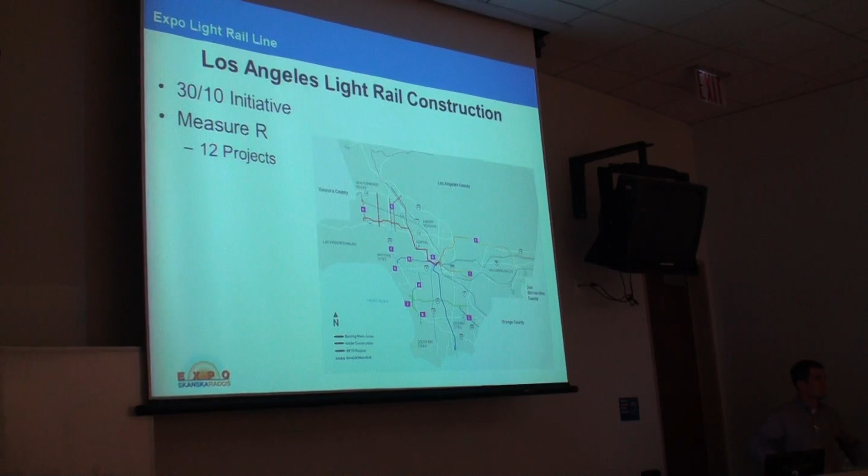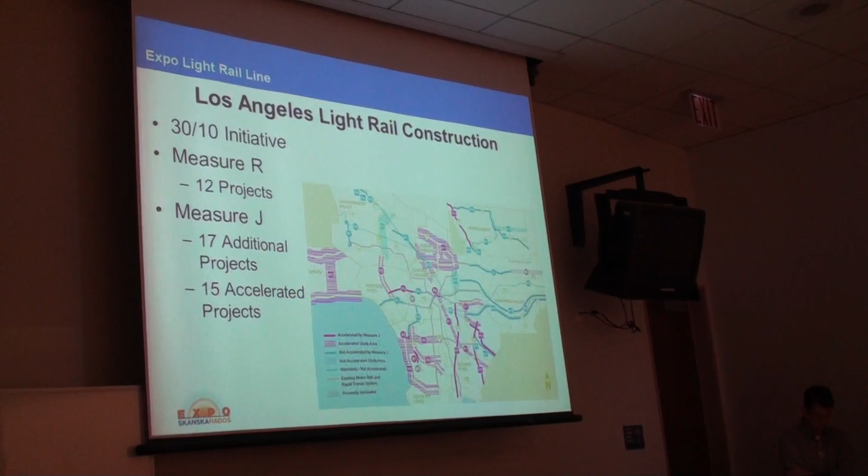And the what? This was all initiated through the Los Angeles 30/10 plan. Measure R was the initial measure that approved 12 different rail projects, Expo 1 and 2 being both of them. Now we're expanding Measure R into Measure J, and you'll see that on the ballot agenda here. In November, the county is proposing Measure J to add 17 more projects, a mix of rail and highway projects, and accelerate 15 of those projects.

You'll hear a lot about Crenshaw, the Regional Connector, the West Side Subway, and then other projects like the I-5 widening, the 91 widening, and of course the 710 tunnel.

So why are we here? The bigger picture of the 30/10 plan: there are 160,000 new jobs. I know our staff well - I was the first transit employee in Skanska's West Coast office, and we're now up to over 100 permanent staff in both our design office and our construction office.

It's going to take 77 million more transit boardings and will reduce the pounds of pollution, reduce fuel consumption, and reduce miles traveled. In Expo's EIR, they predict 64,000 riders on the Expo line per day, which will relieve the 10 freeway - that's the bigger picture.

I'll hand it over to Pat. Okay, so my name is Patrick McCollum. I've been with Skanska for about 5 years. I started working in New York, and about a year and a half ago relocated to the West Coast to work on this project. As you heard before, I live in Santa Monica.

For the past year and a half I've been working mainly out of our construction office, doing planning for some of the structural work as a field engineer. Recently I was asked to move downtown and work with the owner a little more as project engineer, and that's what brings me here tonight.

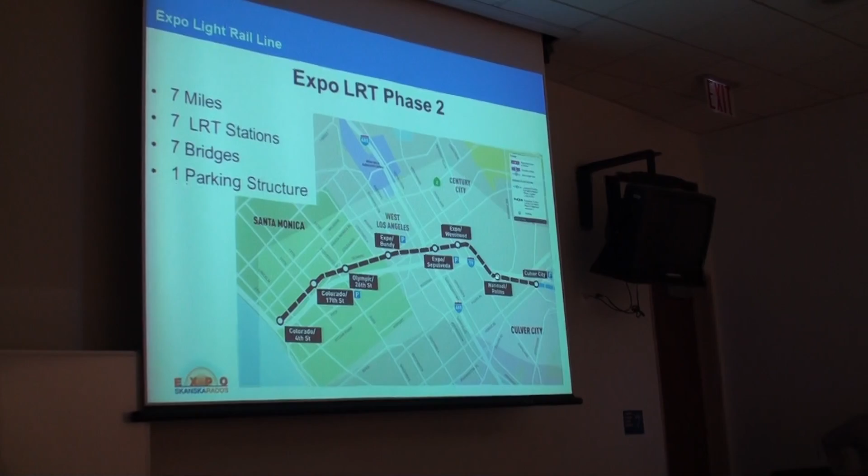We're on the south side of the 10 freeway up until a street called Motor. We cross over Motor and dive under the 10 through a neighborhood called Cheviot Hills. We come out north of the 10 into the city of Santa Monica, and the terminus will be at 4th Street and Colorado, adjacent - actually kitty corner - to the 3rd Street Promenade. So Santa Monica is very excited about our project.

The project is a combination of aerial train and at-grade train tracks. Here on Colorado, from 4th Street to 17th Street, the train actually runs right down the middle of Colorado - you'll have a travel lane for cars and buses, then the train tracks in the middle, then a travel lane for the opposite direction on the other side. So it'll be a multi-use corridor.

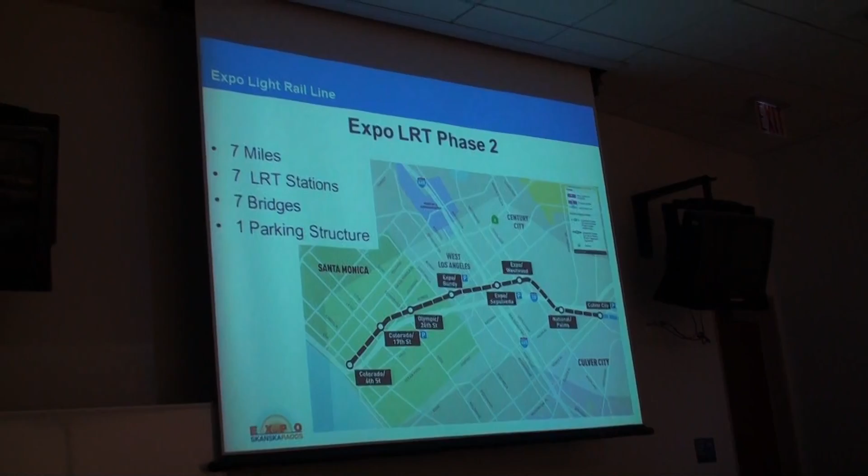Then from 17th Street back to Venice, it's the old Pacific Electric line that was dedicated right of way. Sometimes there are streets adjacent to it, other times it's just dedicated in its own corridor. It has a 100-foot wide right of way, and we're only taking up 26 feet, so there'll be free landscaping or open space for a bikeway to go in parallel. I heard one gentleman in the back say, bike enthusiast.

So it's 7 miles with 7 light rail train stations. There are 7 bridges, which we've started on, and 1 parking structure at Sepulveda. There's also 6 miles of bikeway that will be parallel to the train, starting at Venice - you'll take off through Motor, jog around the 10 interchange, go down National Boulevard, up north on Motor, down Northvale, and then run parallel to the train again all the way into Santa Monica. So you get a nice ride.

Okay, and now we go into the how. Brian told me I couldn't give away any secrets, but I'm going to go through some of the challenges that we faced throughout the process so far.

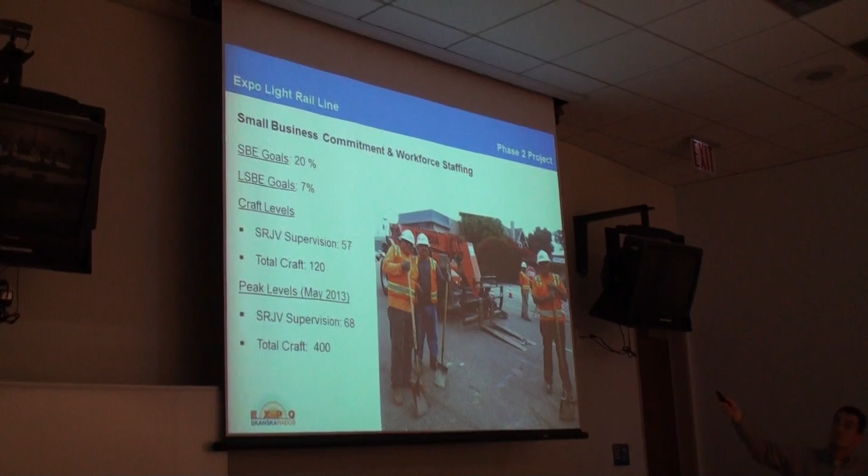Another challenge is the small business community and local workforce staffing. Our project amount is $550 million. Of that, 20% has to go to SBE firms, and 7% to local SBE firms. 20% of $550 million is $110 million. Finding small businesses capable of performing $110 million worth of work is difficult, and that's why we've brought on a full-time staff to help us find small businesses that can help in any viable pathway.

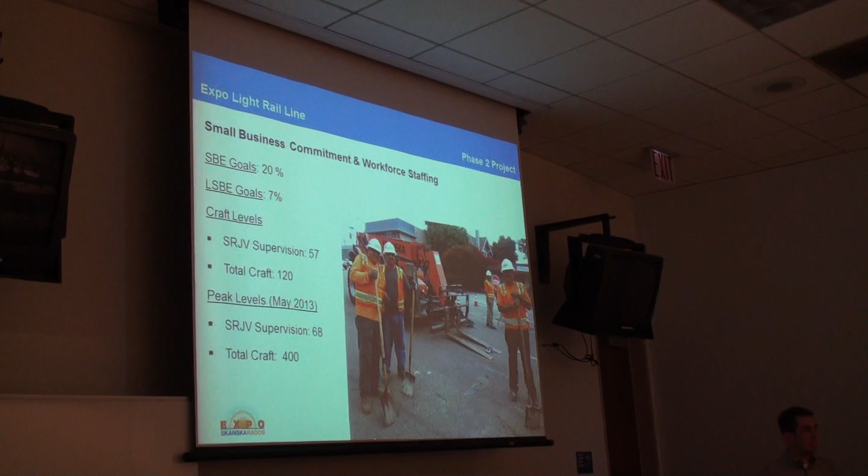In addition to our commitment to local businesses and small businesses, we also have a commitment to local craft. Metro has given us a list of zip codes we're trying to pull our workforce from. Measure R was a tax for people in the county of Los Angeles, so we're trying to hire people within the county, giving back the tax dollars they've already spent.

Right now our craft levels are 57 supervision and 120 craft, and in May 2013 we'll peak at about 400 craft. Throughout the project we'll bring these new hires on board and try to develop them to a point where we can bring them to the next project. That's why safety is so important - after we bring these people on board, we want them to be with us for the next one, and the one after that.

To date - this is actually a few days out of date - we've worked 529 days without incident. And that's not by luck, that's because of all the planning we do.

We have injury and illness prevention plans, and safety, health, and environmental management systems in place. In addition, we make sure all of our management, foremen, and lead men in the crews have OSHA 30 training. IFE training, Injury-Free Environment, is a Skanska training we're doing for 100% of management and 50% of craft by the end of the year. That's another goal we've set because we know how important safety is.

The other reason we've been able to be so safe is the planning. Every activity we do has a construction work plan. We take an activity, look at it generally, then drill down into the details - what work is involved, what equipment and material we need, what crews we'll have, how long it will take, and whether we'll do it during the day or at night. After developing that game plan, it's much easier to go out to the field and execute.

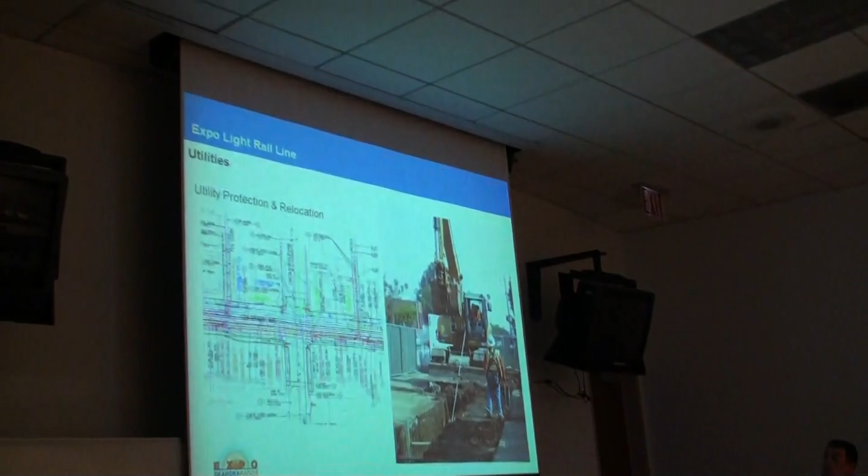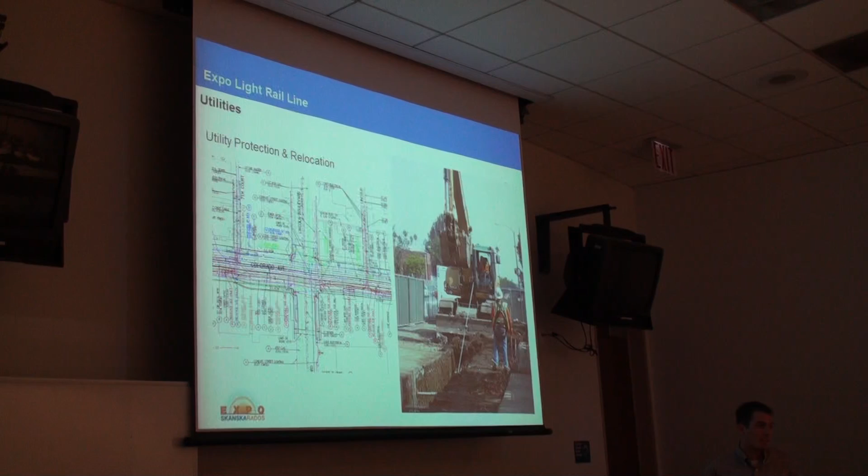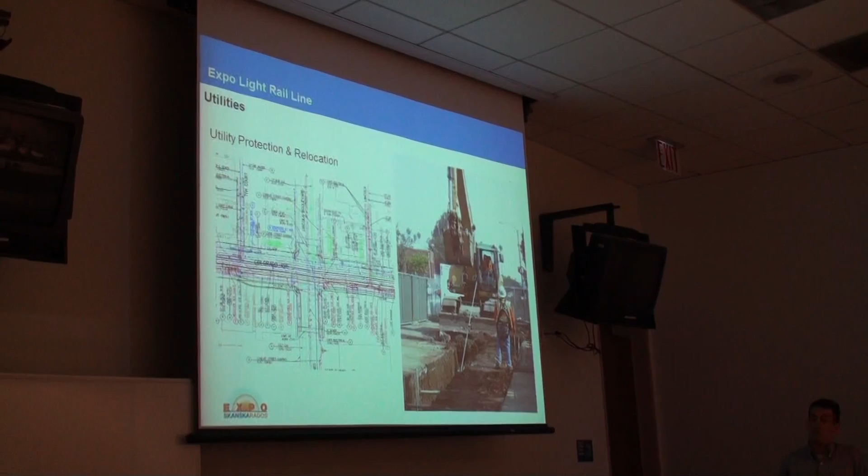One of the major challenges we're facing is all the utilities. You already saw all the different third parties we have to deal with. Each of those third parties has facilities that run underneath our train, the guideway, bridge footings, pretty much everywhere. This is one snapshot of Colorado and Lincoln Boulevard in Santa Monica - if you've ever looked at a plan before, each of those different colored lines represents a different utility we need to work around. Just looking at it, there are about 40 or 50 at one intersection.

So this is 400 feet of the 7 miles we're dealing with. Now granted, Colorado's a little more difficult because it's in the middle of the street, but this is just a picture of what we're dealing with.

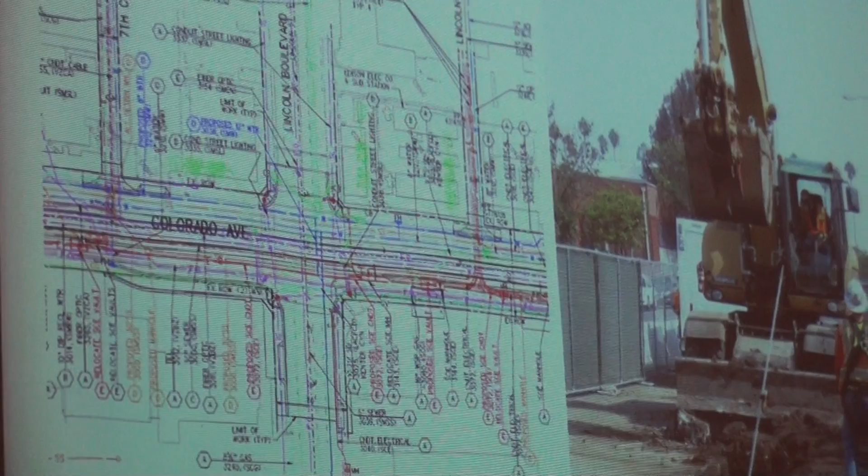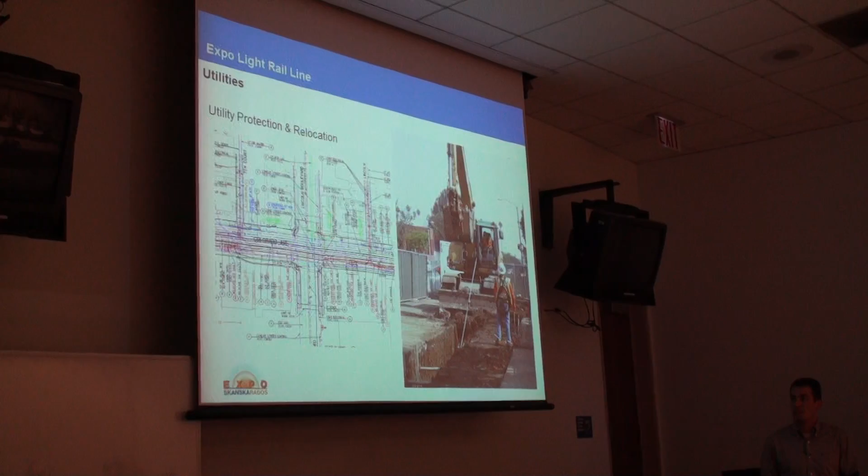One of the ways we planned ahead to work around all this was to do potholing in the first 6 months of the contract. We went out into the street and cut trenches to identify where all the utilities were, because as we looked at as-built information, it wasn't precisely accurate, to put it nicely. So we cut holes in the street and were able to put our hands on all the utilities we were dealing with, then pass that off to our design coordinators, who could design the workarounds, relocations, and protections of those utilities throughout the entire line.

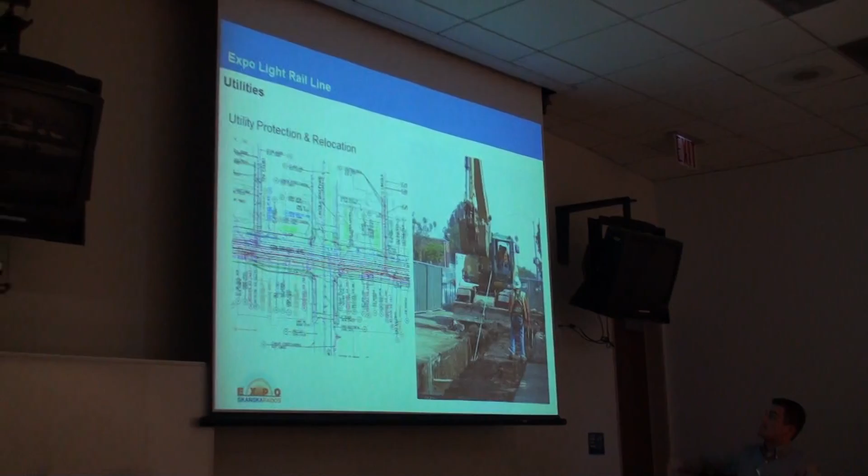So after all that planning is done, it's easy to go out there and make it look nice, neat, and clean, like you see here.

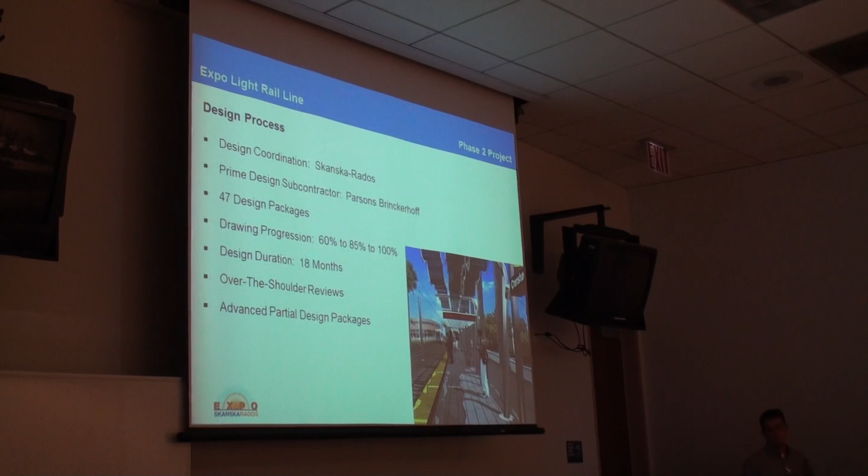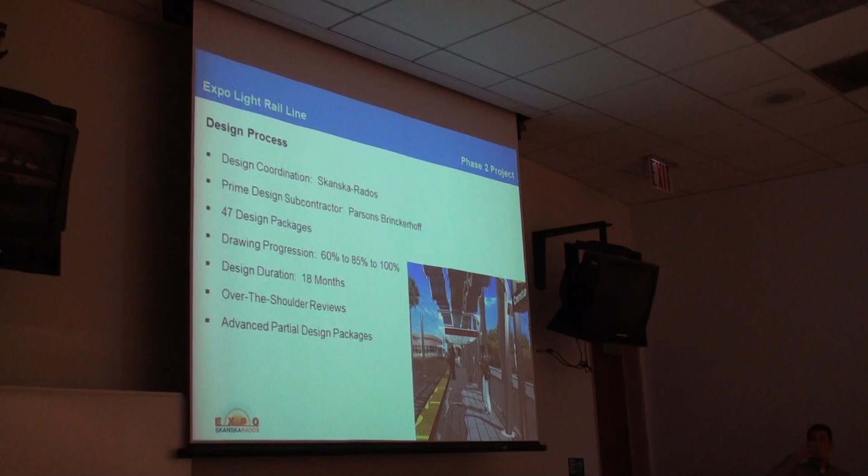The challenge of the design is you have 7 miles of a linear project, and the county reviewing your plans, the city of LA reviewing your plans, the city of Santa Monica reviewing your plans. The city of LA is broken up into 9 different reviewing agencies that have to review your plans. So we broke the plans down into 47 different design packages, trying to make those manageable, bite-sized chunks where they can get a review done and continue on.

So we set an estimate for ourselves of 18 months of design. We're in our 16th month. We hope to wrap it up by this December and then go into design support during construction as of the first of the year.

We also employed some over-the-shoulder reviews with our agencies having jurisdiction. So we meet with them beforehand, discuss our concepts before we turn in the design, and then they have it for a month while we work on something else. And last but not least, the advanced partial design packages.

We pulled out some of those early utilities. Typically the utilities and the roadway, the traffic signals, all goes together in one big package. But we would pull out the water lines and the sewer lines to go ahead of the roadway packages, so we can construct those and get them out of the way of other work.

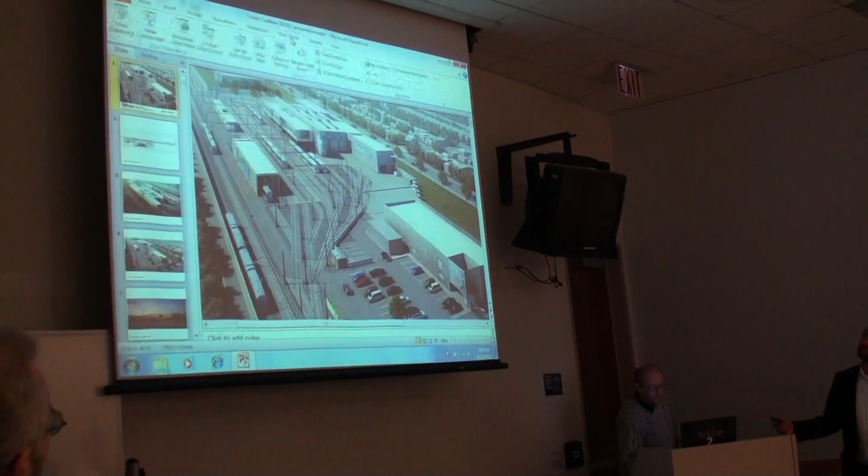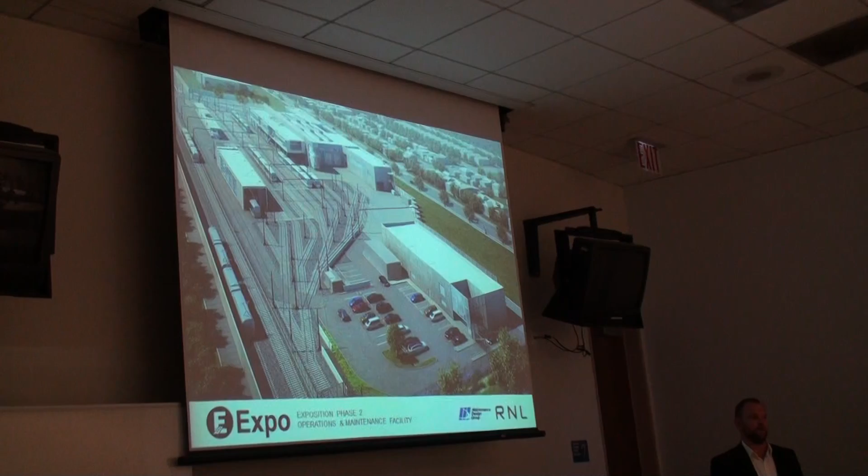All right, so this is the flashy picture portion of the evening. I just wanted to point out a couple of the other team members here. John Holler with Maintenance Design Group was the prime of the project, in charge of the transit planning and equipment specifications, and we've worked together on a number of projects. Will Todd was also one of the project architects on the project from RNL. We've been working on this since about last April - we really got started on the design in earnest, and it's a design-bid-build.

Everybody's going to be brainwashed when we leave so nobody can see what's up here, but we did want to show where we're at with the design and some of the innovative things we've done. This is directly adjacent to the Pico neighborhood in Santa Monica - Olympic is right here, Stewart and Centinela, and this is Exposition Boulevard. All along this neighborhood and all around us we have sensitive receptors identified in the EIR.

And so we've got IMAX, Lantana, a lot of audiovisual engineering and production places on the commercial side, and then neighborhoods, single-family homes on the south side.

So we walked into the project knowing we had to get buy-off from the neighborhood side first, and that's how we started the process - sitting down to hear what their issues were. The primary concerns were noise of the yard.

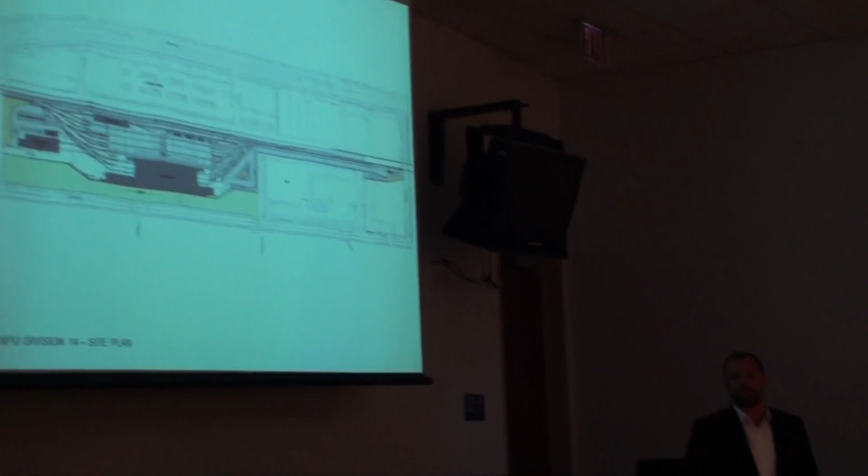They had taken their neighborhood group out to the green line and listened to it, and they were concerned about a number of things, including light spill. They wanted to make sure that at night, when operations and maintenance were going on, there wasn't a lot of light spilling into the neighborhood.

And then in the EIR, the maintenance facility was located down in this corner, and this green strip is a buffer. So the building came right down to the edge, and the buffer was a little wider out here, which left the yard exposed to the neighborhood.

One of the things we said, first and foremost, was we wanted to move the maintenance facility building to block sound and light from the neighborhood, rather than trying to do it with sound walls and other things that don't work as well as a 30-foot high building. So we did that and got buy-off from the neighborhood to proceed with the site plan.

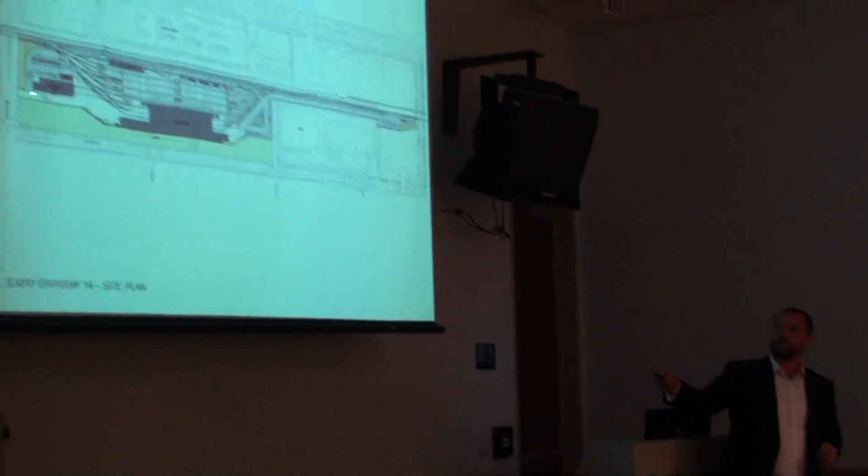One of the nice things it also allowed us to do was change the original stub-end shop design. With 3-car train sets, we had to move 2 cars out of the way, pull 1 car out that might be buried, and then move the other cars in. So the number of train movements was considerably higher than what we ended up with in the final solution, where trains can just pass right through.

In real quick terms of how the whole thing works, we've got the primary entrance for operators and maintenance personnel coming into this parking lot. There's a guard shack, so this is really the primary entrance. And then a fire lane comes across, running right adjacent to the main line.

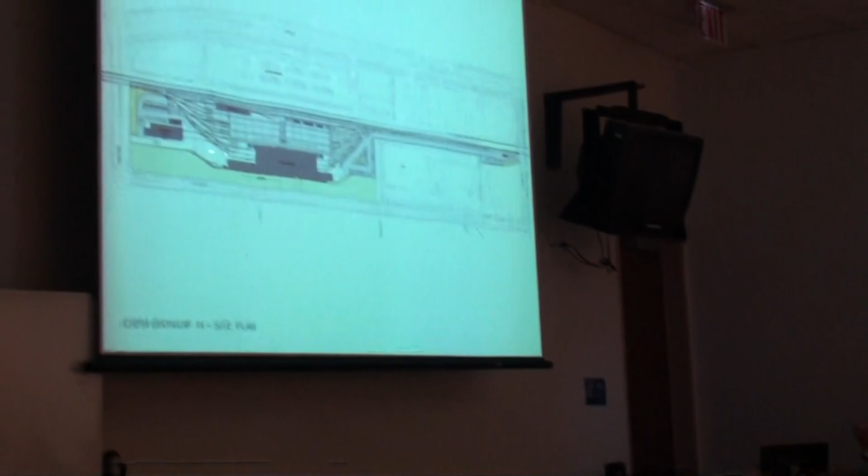We've had a number of coordination meetings with SRJV. And then the delivery entrance comes in here, into a loading area and parking for operators - this is administrative and maintenance personnel, and that's operators.

And then we broke apart a few of the other specialty buildings. The main building itself has warehousing, maintenance and shops, then 6 S&I - service and inspection bays - and 3 positions for component changeout to do heavy repairs.

And then on the north side is just a 2-story building, and we'll see that when I show you some of the renderings. That's where the operators are housed - they've got their lounge and break room and their spaces, as well as administration.

Out on Stewart Street is the blowdown, where they wash the underside of the train and do heavy cleaning on a periodic basis, and then the wheel truing, for when they hit the brakes hard over a flat spot in the wheel and have to re-true it with a lathe. So that's some specialty operations that happen in this secondary building.

Our traction power substation sits right adjacent to it. And then the car wash, for the trains on a daily basis, comes through and gets an automated wash cycle, and a cleaning platform where personnel go in with vacuum bags and clean out the inside of the train.

So that's generally how it works, and then the rest of the yard is basically where the 45 cars that make up the fleet will be stored.

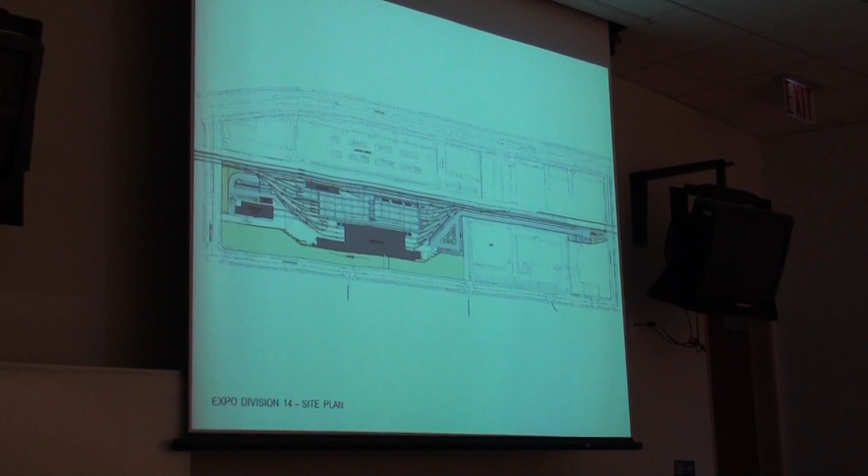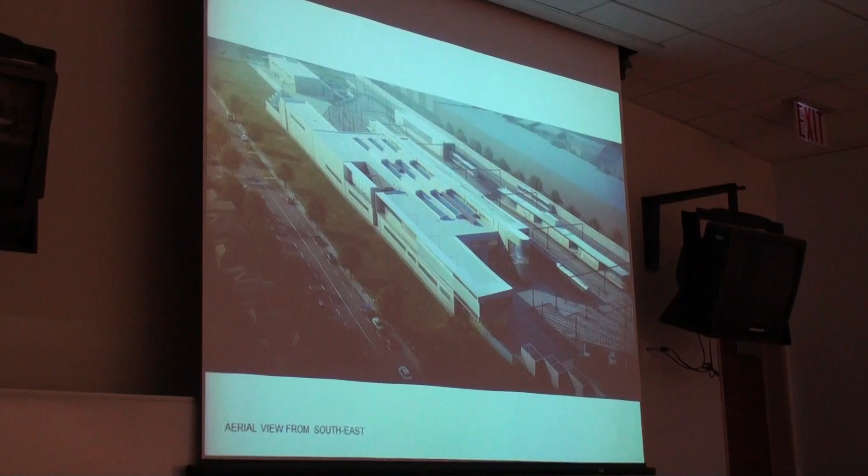One of the things we knew we needed to do when we stretched out that building - it's 500 feet, well, 540, something like that, long - it's an extremely long building, but to put something like that next to a neighborhood is an architectural challenge to break down the scale of that.

So what we did was, using all those different components - the administrative areas, the maintenance, some of the shops, and the warehousing - we broke that down, so we've got a building that really doesn't impact the neighborhood negatively. And we did a number of things to bring some sustainability measures into it.

I'll save that for later. Got a slide that kind of explains a lot of that.

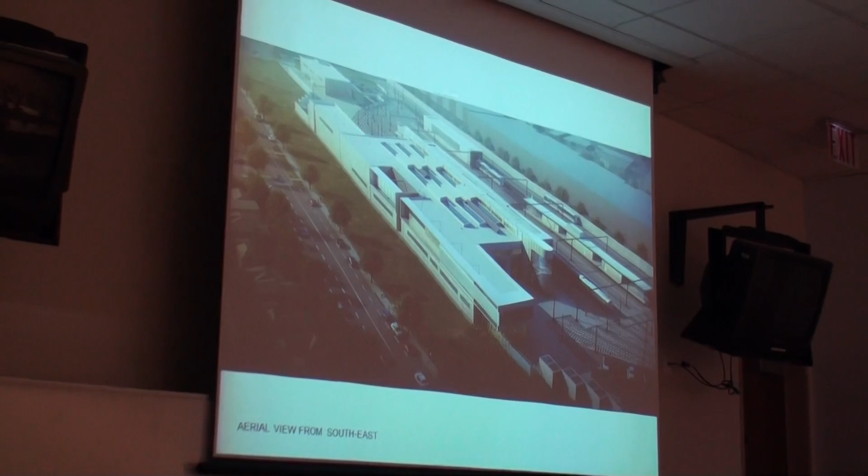We did a gesture here to the neighborhood to really make the front door, although it's not accessible from the neighborhood, we put glazing there, and we've got a view into one of the nicer parts of the building itself. So not really turning our backs and saying you've got no business knowing what's going on in this yard, but I would open it up to the neighborhood.

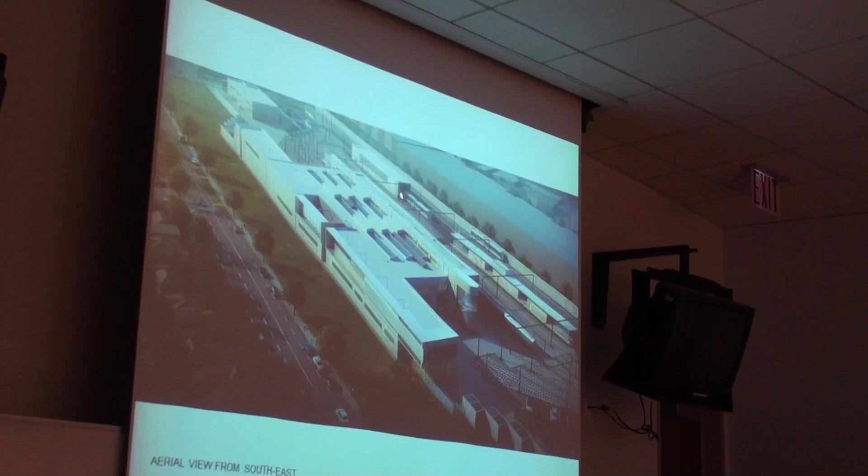So you can see the other buildings I talked about. The cleaning platform has a covered canopy over it, which is really helpful for the people working out there at night, in the cold and the rain on occasion. The train wash, and then the secondary building.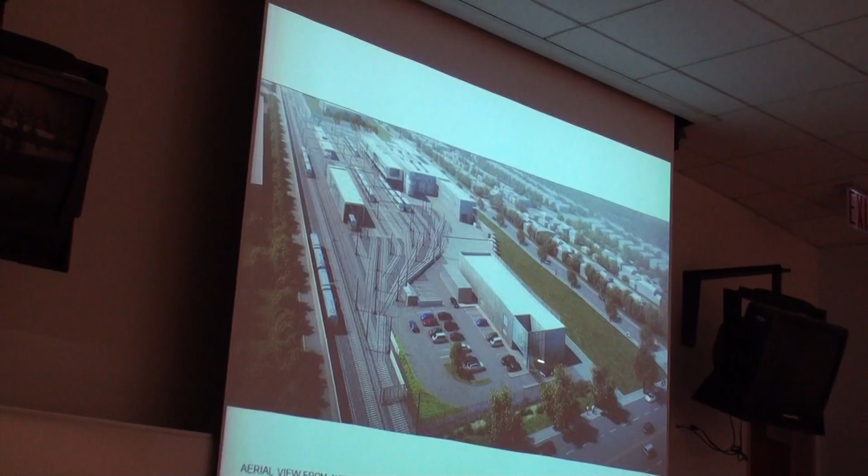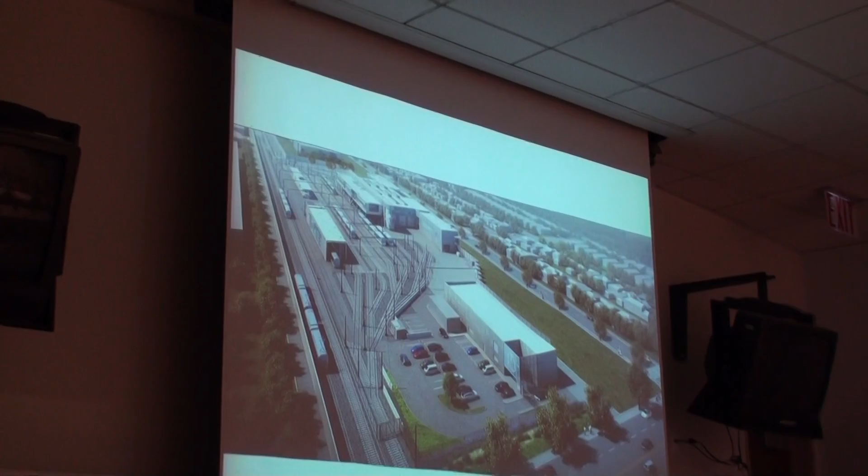That's another view from Stewart here at Exposition. Good opportunity there for some signage to really let Metro's logo and brand identity show, and you can see the main line running right along here. So everybody going past this is getting a look into the yard, getting to see some of the operations that are going on, versus kind of hiding it all behind walls.

That's a ground level view of that same angle, so that's the grade crossing at Stewart. And this is from the corner on the other side of Stewart and Exposition, so the neighborhood is off to the right here. And this is basically how we eroded the corner there, and whatever they do with the buffer is a good sort of pedestrian connection.

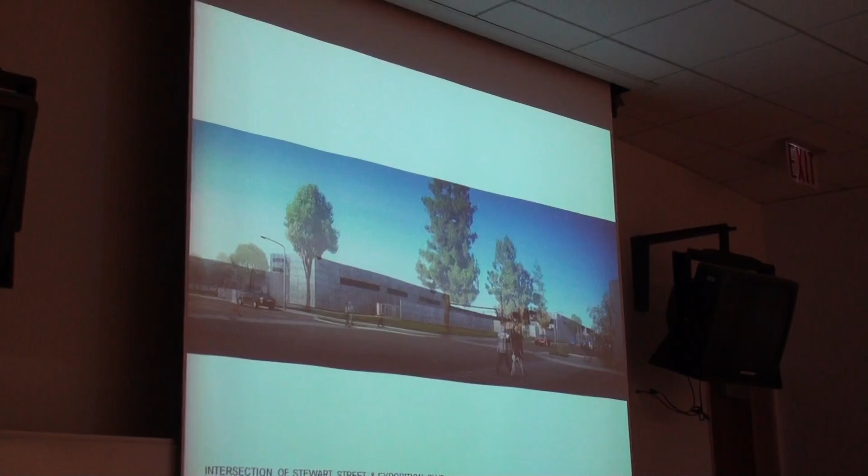We brought a green belt basically along the entire south edge of the site, so it's helping make a nice pedestrian environment next to a rail yard.

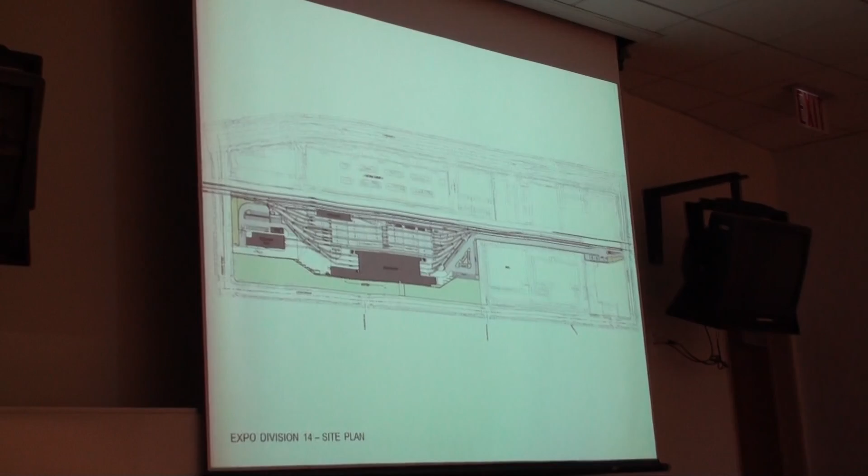Covered the site plan, but let me zoom in onto the building itself. This is a plan of the overall layout and the main entry into the lobby. So this is that ornamental stair that I was talking about, coming in, elevator, and a break room for the maintenance personnel, and then their changing room and lockers.

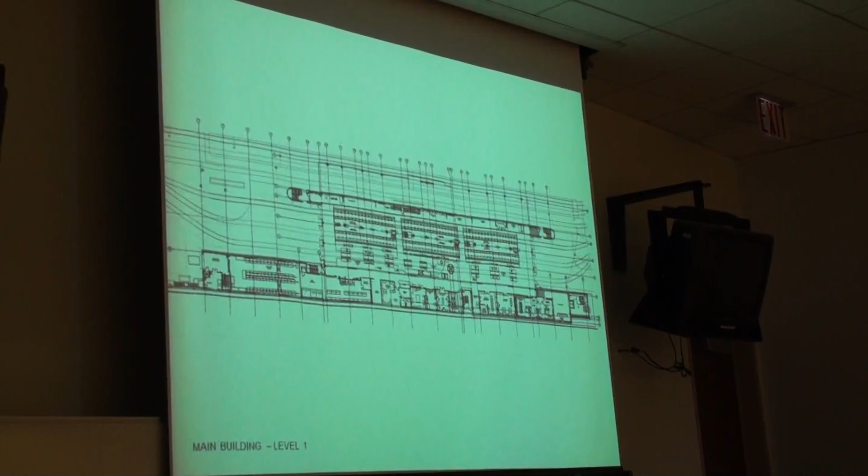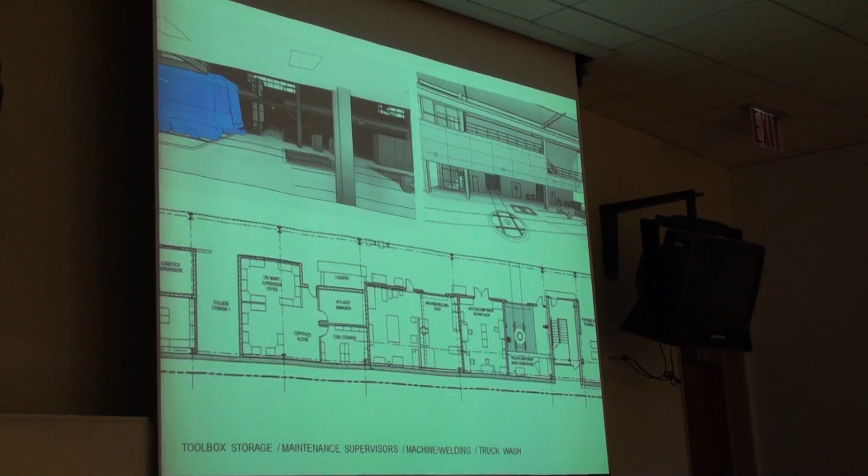Toolbox storage, this is where a lot of the working on the trucks and the wash of the trucks happens, and replacing and fixing things on the trucks for the wheels on the other side of the train, and then some specialty shops for machine welding and component repair.

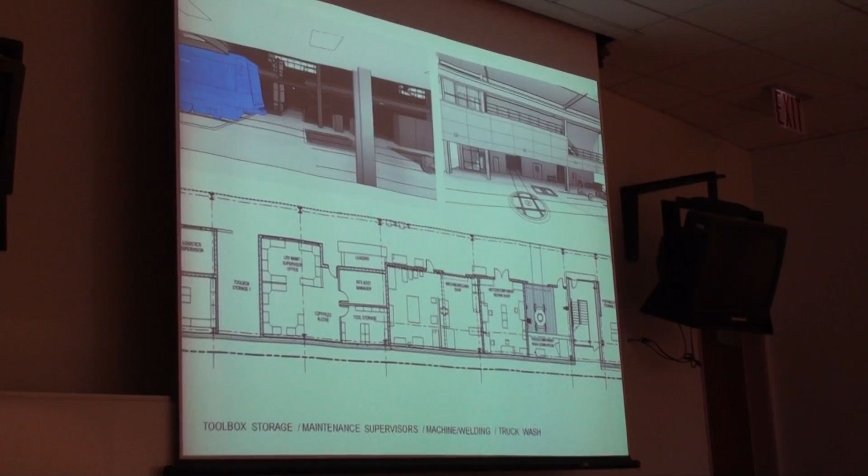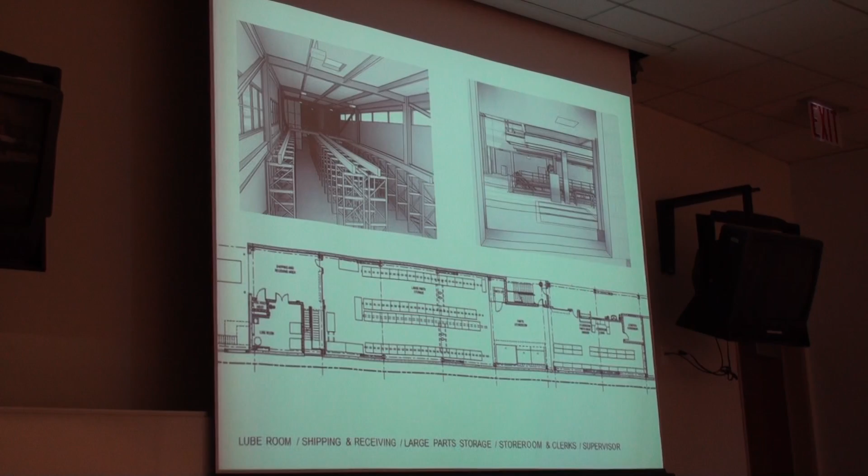Then the maintenance supervisor shop, and then it starts to lead into the warehouse space, the parts, shipping and receiving. So a number of racks and storage equipment that allows them to densify all the pieces and parts and have it on hand, keeping it in a dense, efficient footprint.

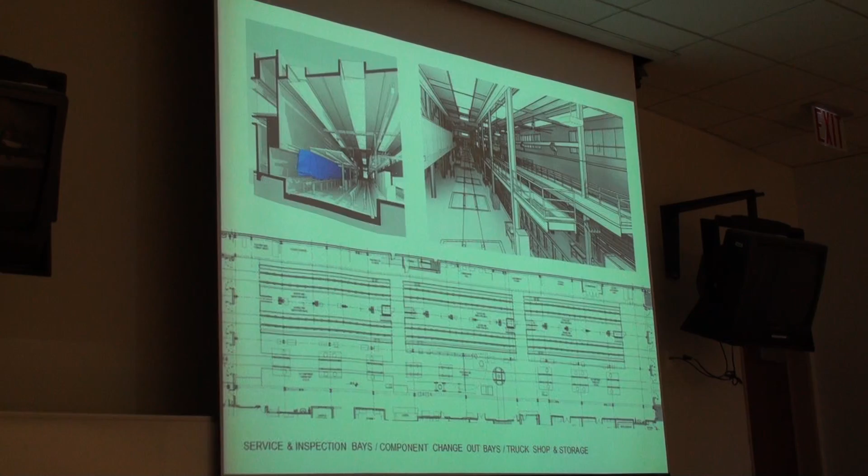And then looking into the main maintenance bays, we really wanted to open this up. We brought skylights in that bring a lot of daylight down into the area. These are 24-hour facilities, so sometimes they're working during the day and can benefit from daylight. We wanted to make sure this was an energy efficient building. We're well within LEED Gold and approaching LEED Platinum, which would make this the first LEED Platinum rail maintenance facility in the country. It really improves the feel for people when they're down working in the lower level work areas — they get daylight and some fresh air down there.

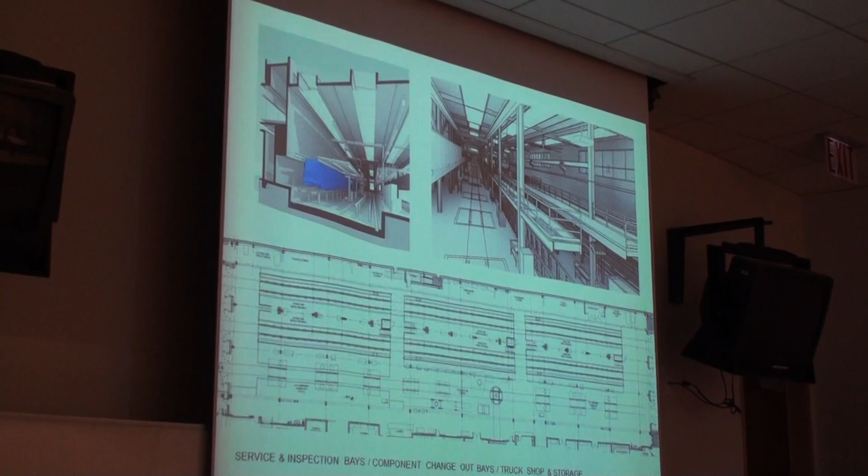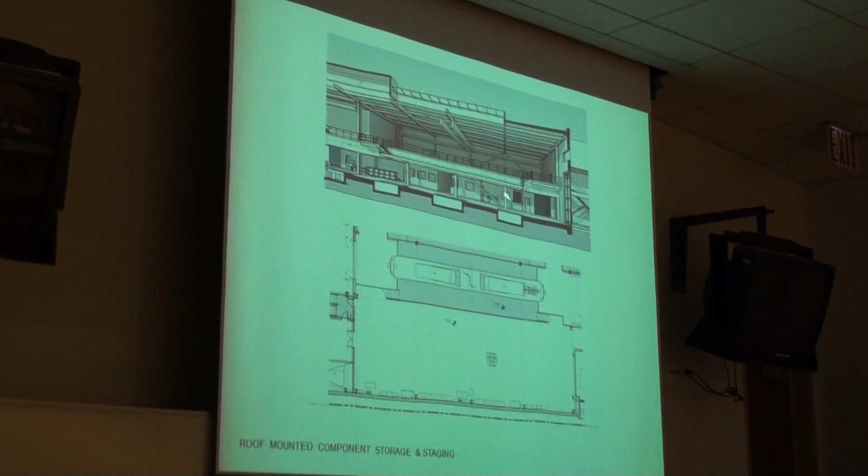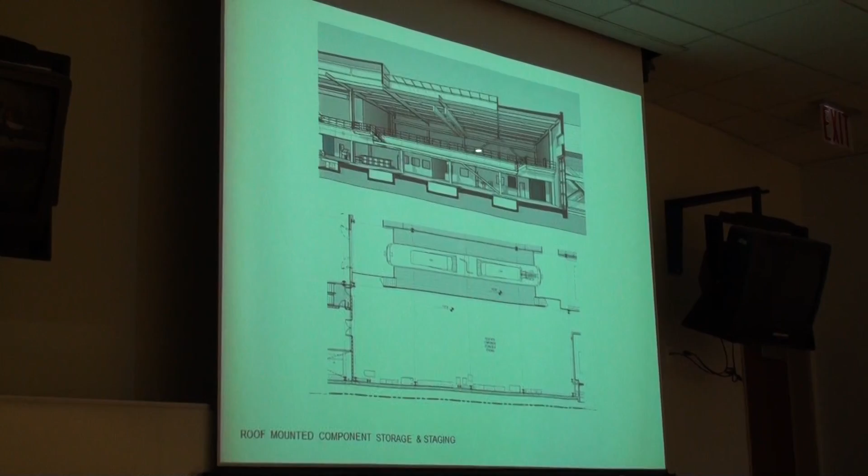Above the parts storage here, we've got a bridge crane that picks up the air conditioning units and other rooftop mounted equipment on the trains, and can slide it right onto a mezzanine level. So there's no complications in staging—they just pull the train right in, pull that off, and slide it onto a mezzanine to be replaced or worked on. That's the upper level of the shop, parts storage.

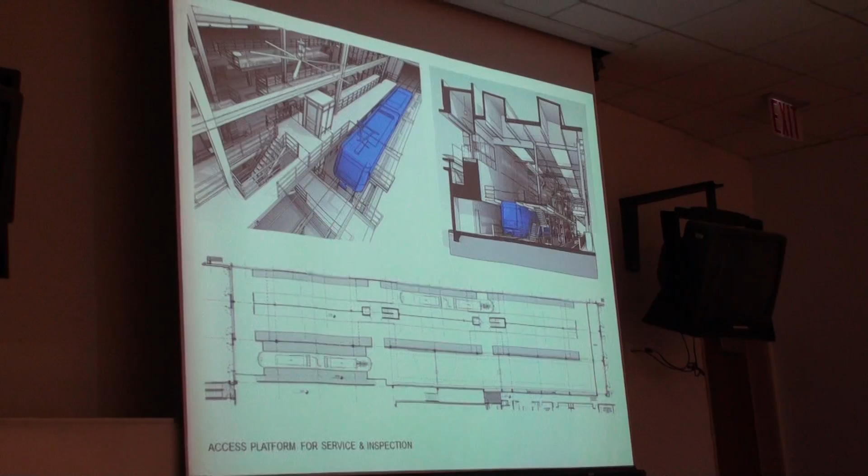One of the things we did that was really innovative—and John, you can touch on this a little bit—is the way we handled the upper level work platform for when maintenance personnel need to work on the pantograph and elements on the top part of the train. With an overhead catenary system, that's a powered line, and there's a lot of danger of electrocution if you're not careful. So it's got a lockout system that doesn't allow you to go up onto that platform unless the overhead catenary is deactivated. Probably not doing it justice, John, but it's top secret.

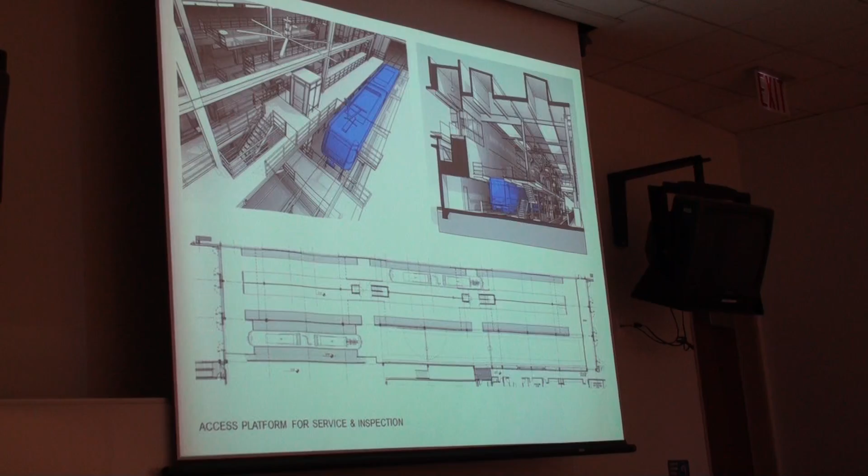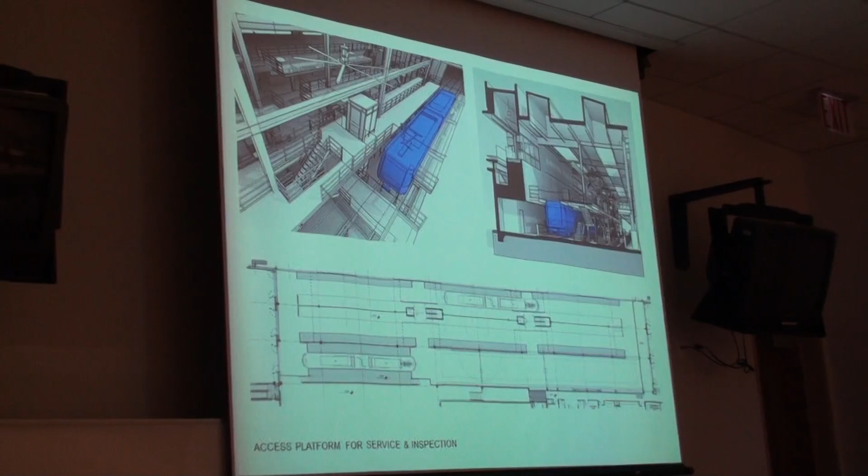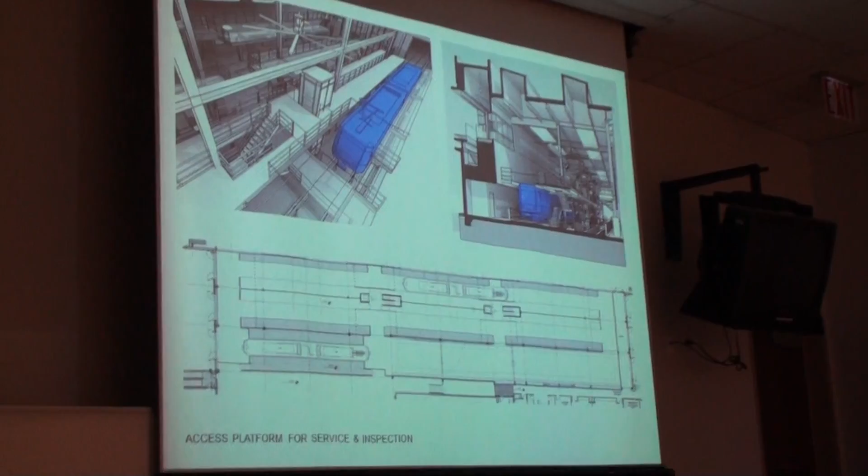It's really something we've done to innovate on best practices that Metro's been willing to accept. We're also using a different way of handling thermal comfort in there. Typically you have a lot of gas-fired heaters and just relying on natural ventilation or forced air. We're using what's called in the industry a big-ass fan—basically a gigantic ceiling fan that turns at a really slow velocity but pushes a large volume of air. You can use it in both directions, and it actually helps heat the space by pushing hot air from the upper levels of the shop down to the work area where the guys are working on the other side of the train.

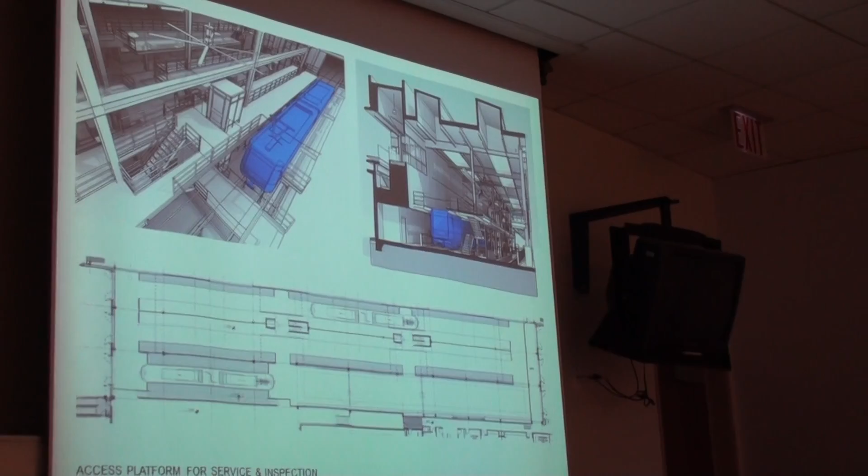But it's super low energy consumption and allows us to approach a net zero energy readiness. So if Metro decides to increase the amount of photovoltaic solar panels on the roof, they can reach energy balance where the power they're drawing to operate the facility is offset by renewable sources. The meter actually turns backwards, which is nice, saving Metro some money.

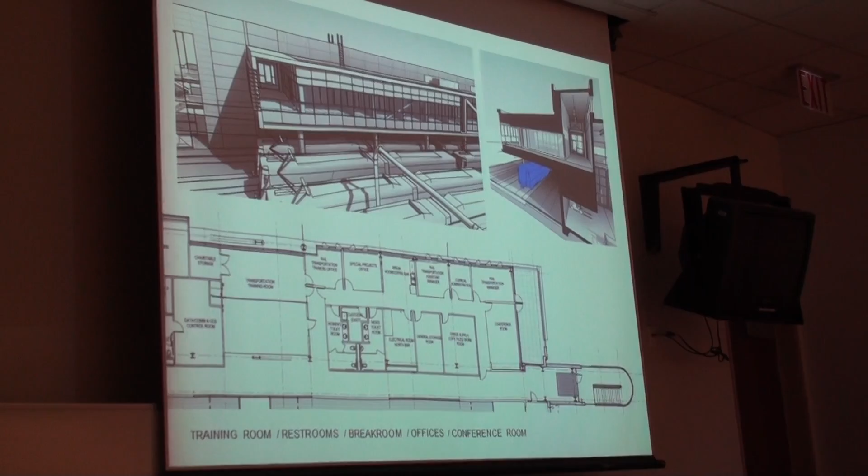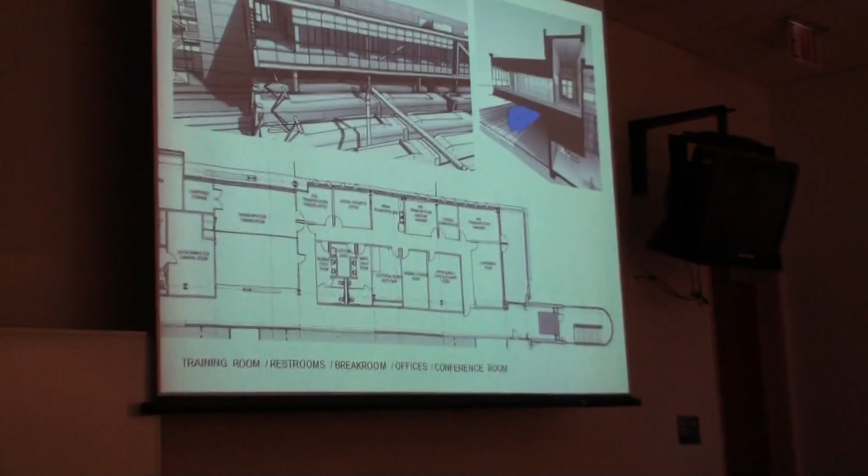On the north bar, as we're calling it, the administrative suite—all the rail transportation managers, conference rooms, and some executive spaces for the people that run this facility—are here. They've got a good view out onto the yard. That was one of the challenges as well, since there's a general feeling that they want to have eyes and ears out onto the yard as much as possible. So we placed those program spaces out, hovering over that. We went through some gymnastics to get it to be a second story space, but managed to get them a really great view of the yard.

Then as we go into the control suite, this is where it's really critical. We pop that volume out so they can see a 180-degree view in both directions of all the trains in the yard. That was something we're really happy we were able to work into the design.

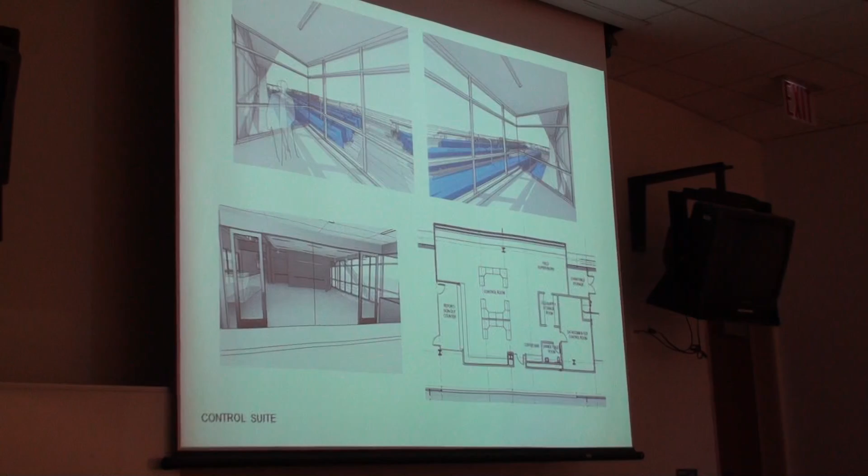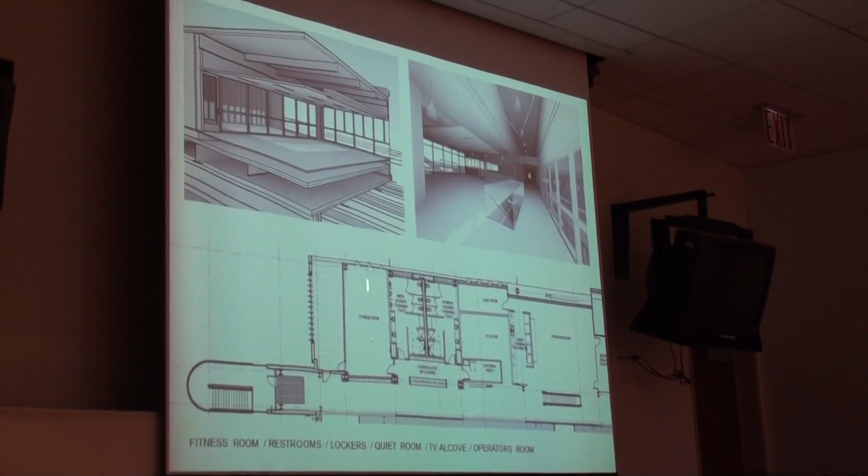Then the operator space—their home away from home when they've got a layover between shifts. They're up here doing their thing. There's their operator's room and kitchenette, a quiet room if they want to take a nap or read a book, a TV alcove, and then their lockers and the fitness room, with a patio that opens up out onto the west side of it.

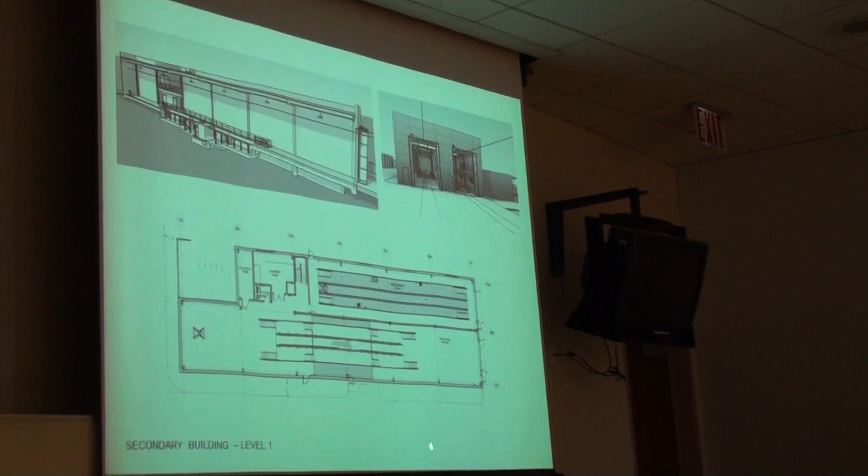Jumping over to the secondary building, this is the one out on Stewart. The wheel truing and blow-down bays are two fairly specialized pieces of the project. We've got a subgrade pit the wheel truing lathe sits down into—they just pull the train in and bring the lathe up, and it trues the wheels right as they're sitting in place. So it's a fairly seamless operation, and they move each truck along inside of that building. We can close the doors, minimize the amount of noise that spills out, keep the neighbors happy—everybody wins.

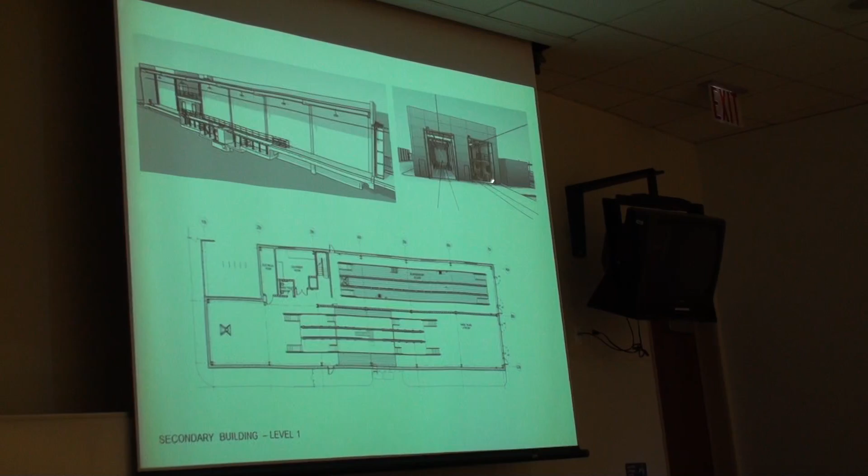And then the blowdown is a real dirty, wet operation. Same thing—we pull the car all the way in, close the doors, and they go to town and wash the junk off the bottom side of the train that accumulates over miles of travel.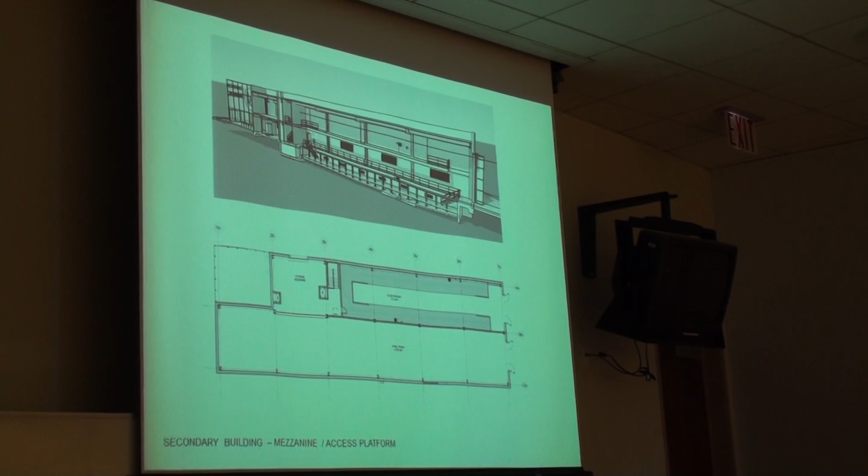It's just got a drain that basically captures everything. It's a posted rail, so there's space underneath to let people be underneath and wash the underside of the train, and all the junk kind of slides down the drain underneath them.

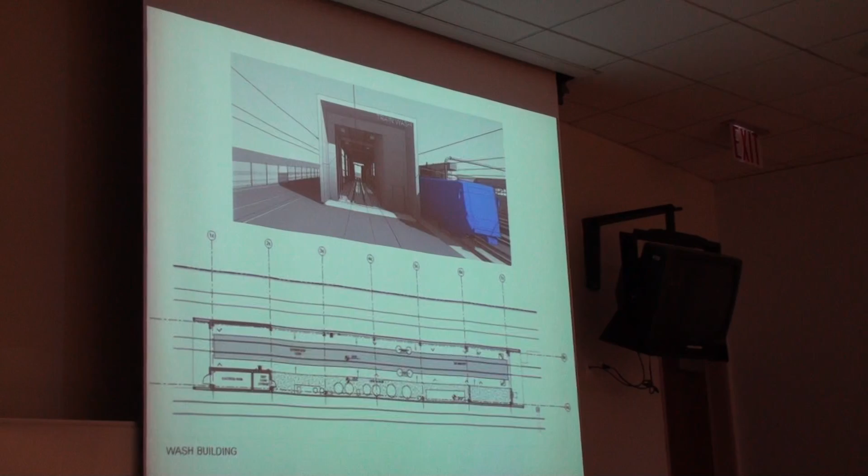The train wash is fairly simple, just a clean shell, but we wanted to try to daylight it as much as possible, again keeping the energy consumption down, and load up all the equipment so they just pull through at a prescribed rate for the train, so they can get every nook and cranny washed on the vehicle itself. And then pass right on down to the cleaning platform.

Where they wash the inside of the train, vacuum it out, and take care of the sanding that they use for traction, or refill the sand in that phase of the maintenance cycle as well.

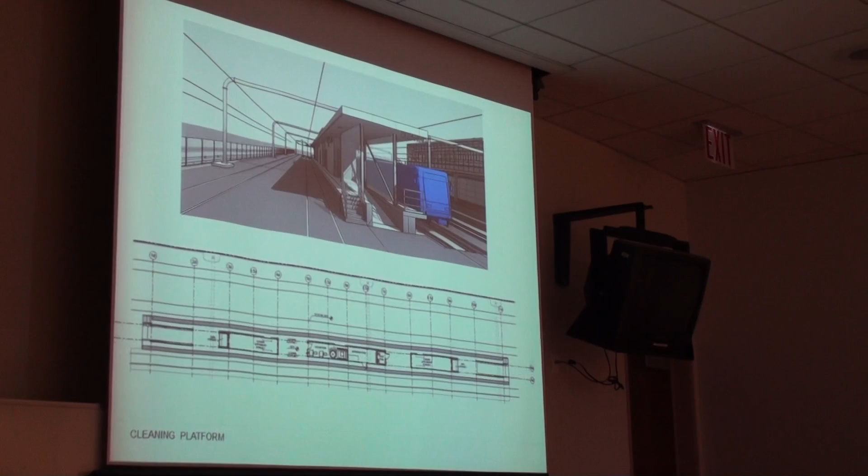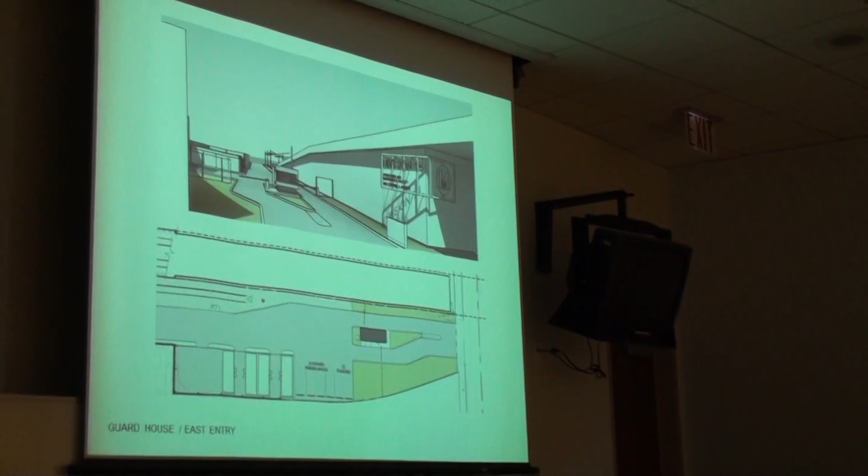And then lastly, down in the guard shack, part of the interface with the main line as well, dealing with our signage. We wanted to make sure we got good Metro brand identity and recognition, and people know where they're going as they come off of Centinela and into the facility. Some maintenance of way equipment and storage here, and a maintenance of way track also that they can use for the main line. So just a few more close-up shots.

The stair, we did some fairly creative stuff with it, kind of radiused it so there's a little bit of an image for the building that people can identify with. And if anybody's familiar with the Van Nuys flyaway, that cable system they're using there, it's the same sort of deal here. So it's a series of cables that create that guardrail, something at least somewhat interesting architecturally.

We knew we couldn't just go in here and slap together a maintenance facility on a low budget. Santa Monica holds to a pretty high standard of architectural design, so that was one of the things we really had to take to heart. And we went before the Santa Monica Architectural Review Board, and came away with no comments. So we were pretty ecstatic about that. That doesn't happen too often, if ever.

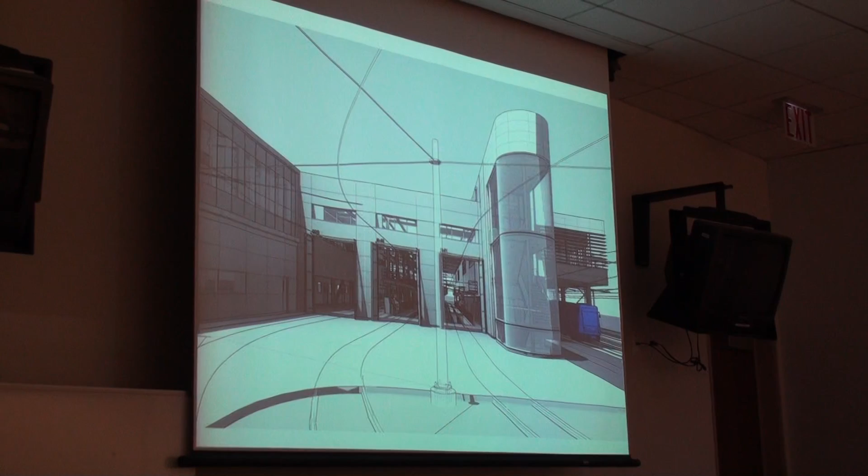Our work on the front end paid off to make sure the neighbors were happy, the neighborhood association was happy, and then ultimately the city was involved all the way through.

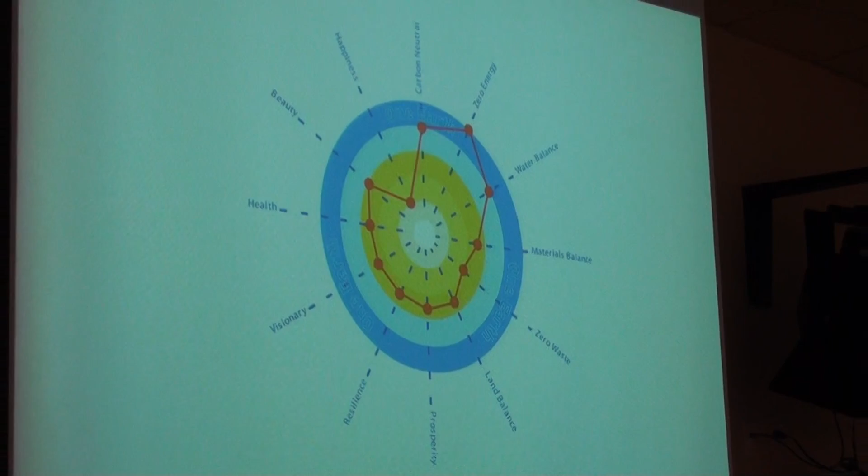And then lastly, I want to touch on the sustainability things that we did. In the early programming process, we used what our approach to sustainability is called Design for One Earth measures, in alignment with APTA's sustainability commitment. Not just the things that LEED deals with in environmental engineering, but happiness and beauty and social sustainability as well as economic sustainability. So we can build a great net zero building, but if it doesn't pencil out and it costs the agency a lot of money, then it's not really all that sustainable.

So this little rose diagram demonstrates where the agencies, all the different Metro Expo folks, weighed in and said these are the most important things to us. Net zero energy was clearly high up on the list, and happiness—there's a lot of metrics for how you quantify happiness—but clearly that was something we didn't say was unimportant, there were other things that really trumped it. It was more about building performance, because this isn't as much of a public facility as, say, a transit center, which would put happiness really high up on the list. Health and some of the other values were kind of middle of the road, but that gives us a roadmap for how we make decisions on sustainability measures.

So one of the things that we really were happy with is the amount of water that we're capturing and saving. Santa Monica's got some pretty steep penalties for letting your stormwater just run down the drain. So what we did is capture everything off of the buildings and everything out of the yard, and we have two gigantic rainwater storage basins here, and that's going to train wash and irrigation.

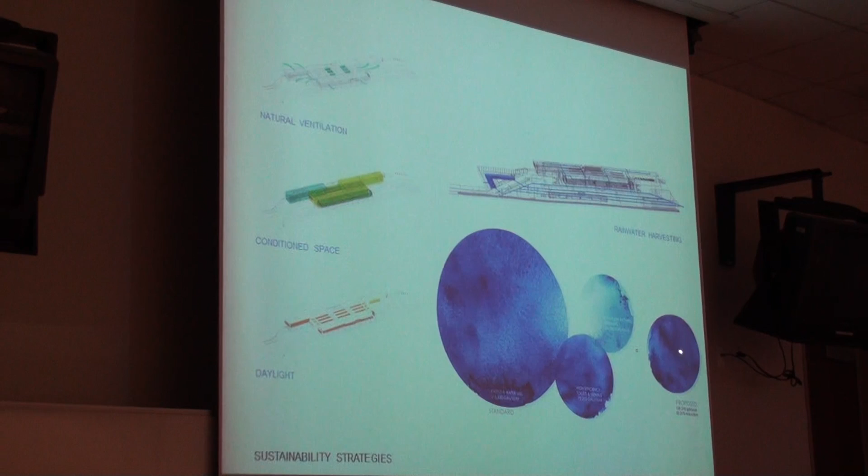We're offsetting—this is the baseline standard for how much water would normally be used in this facility. That represents the savings we got from high efficiency toilets and urinals and low flow fixtures. So that's actually the amount of water that we'd be using, and then we're offsetting it with the amount of rainwater that we're capturing. So a pretty significant reduction in the amount of water being used.

A couple other things too, I mentioned the natural ventilation. The big ass fans are drawing the air in from the open doors in the summer, and the thin sort of profile of the building allows them to use the operable windows in the people spaces and let breezes pass through.

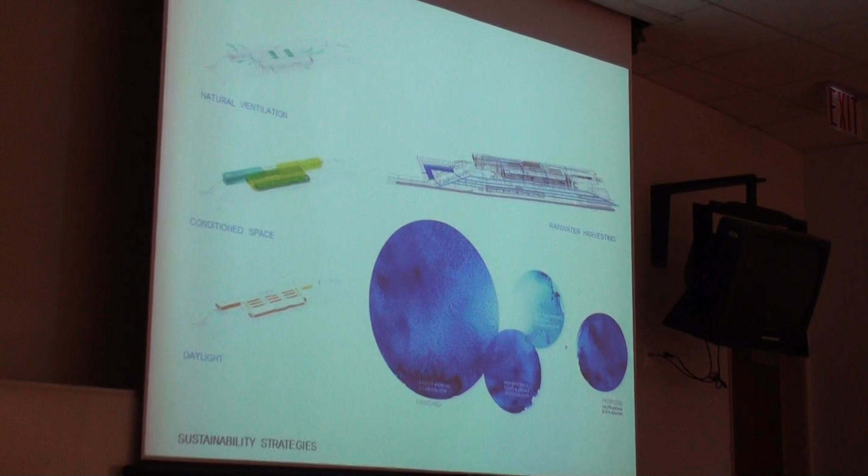Santa Monica's got a great climate to begin with, and they can capitalize on that versus having this really tight building that runs the air conditioning all day. Conditioned space we also looked at—the shops still need to be at 68, 72 degrees, but they can fluctuate a little bit in temperature. The people space really does need to be well separated, so we treated those as fairly highly insulated boxes within the overall building, and let the space where trains and shops and warehouses are be a little bit more temperamental, with a wider temperature swing. So we're only putting energy into keeping thermal comfort in those blue bars.

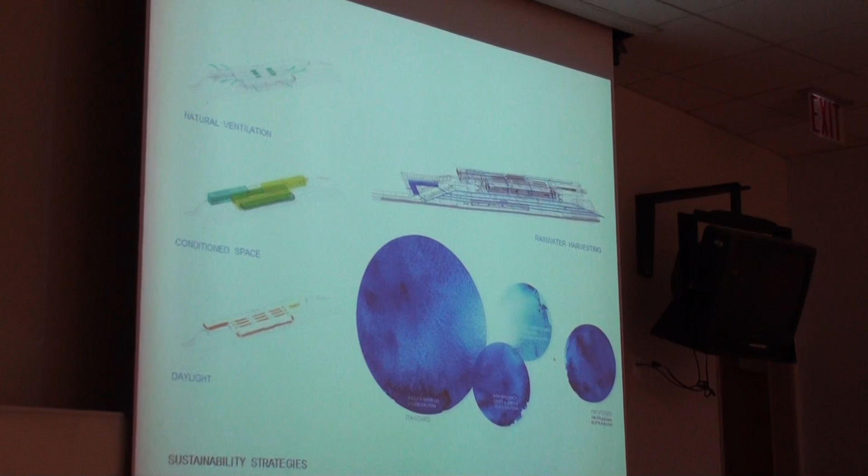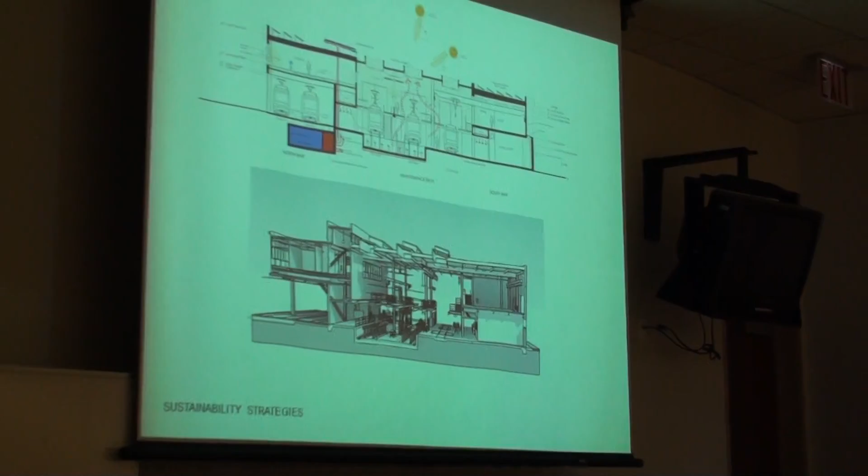Daylighting also was a critical piece of it. We did quite a bit of things to make sure this wasn't just your average old maintenance yard, and as a result, we're pretty happy with it. The outcome, Expo's really happy. We just finished 100% design, and we're working through quality control, making sure we've got a good, tight set of documents that'll go out to the streets. And that's it.

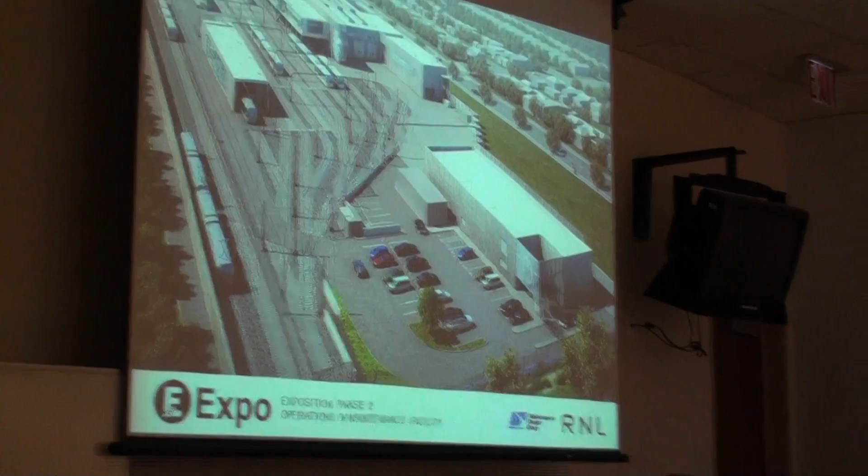Aaron, what are you doing with the car wash and the blow down water? Is that filtered on site and sent away, or what happens with that? Typically those systems have about an 80% reclamation, supplementing what we don't have with the water that's on site. So most of the water stays in a closed loop.

But the water that you don't use, where does it go? It goes into a sand oil interceptor and then goes into the sanitary sewer.

How big's the property? 8.2 acres? Yeah.

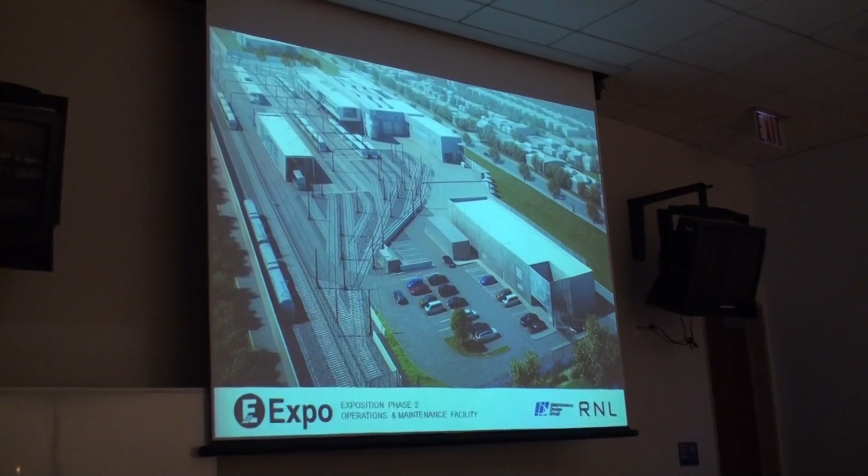But the businesses are not on the other side of the main line traffic? The businesses over here are, and then there's a sound wall that Montana built themselves, to their own criteria, and that's already up right now.

I do know of a radio station in Pasadena that built themselves right next to the gold line, and every once in a while you can hear the train going by.

Those curved stairs at the end, when you say that uses a flyaway screening, that's a woven wire, stainless steel wire system? Yep. And so those are obviously in open air? They are.

This is just an aesthetics question, and since the neighborhood association's passed on it, it must be good. But from your earlier renderings, looking at it from the neighborhood, it looked like a lot of the wall was just bare concrete. I was wondering if that's true, or if there are plans by Metro to spruce it up a bit. Since they're doing the buffer, we weren't going to pump a lot of money into making a highly decorative facade. We approached it with the design philosophy that it should be a fairly quiet building, clean, modernist palette of materials. There's anti-graffiti coating on the concrete, and we've created that transparent part of the lobby, which discourages bad activities by putting some eyes and ears out onto it. But the buffer itself really is the palette for what they want to do there, and the neighborhood can control that. If we put a whole lot of gingerbread on the south side of the building, it just gets covered up by the buffer, and we'd have wasted the money.

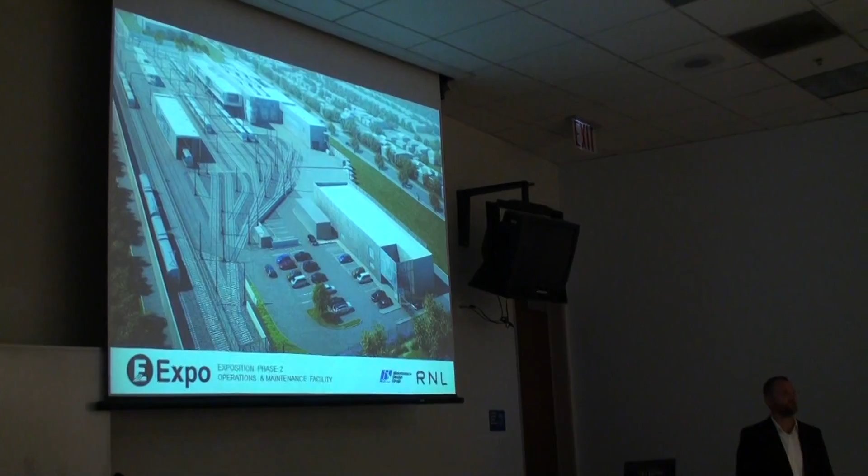Is there any hazmat remediation, any problems that you're aware of? Nothing significant. There's some methane down there. We're working on the Santa Monica corporate yard as well, and there are some soil issues there, but as we get down into this part of the site, it's fairly minor, nothing that's going to require a lot of over-excavation.

How long are they projecting that it'll be finished by? 2016, 2017? This will be done before the main line comes on.

Aren't there a lot of mature trees in Colorado where there's construction, and considering the whole mess with the trees, I never heard a huge outcry. As far as trees on this site, there really isn't. No, I meant on Colorado. Wrong presenter. Yeah, we only go up to the main line, so that's next.

Okay. How far along are you? Have you cleared the land and started?

No, we're not out to bid yet, so like I said, everybody's got to get brainwashed before they leave here on the street. But we're finished with design, and it'll be going out for procurement after the first of the year, somewhere thereabouts.

Anything else? Well, we could get both teams up if we have questions. Does anybody have any unanswered questions at this point?